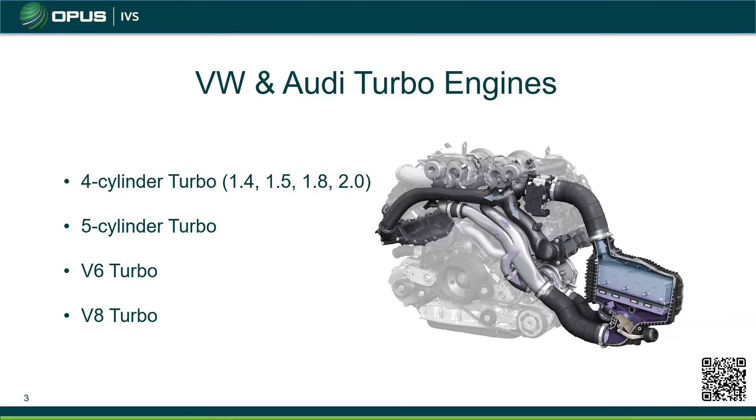The first engine we're going to talk about is the 1.4 and 1.5 liter. Other than previous generations, the 1.4 started using this turbo setup with essentially an air to water intercooler.

See Caesar raise his hand. Uh, okay, I don't think we have anything there.

So the next thing here is the 1.4 and 1.5. The 1.5 is the latest generation of the 4 cylinder turbos. Like I said, they're using these in the Taos and the newer Jettas. They are having some issues with head gaskets, but essentially the turbo issues you've seen in the 1.4 are also the same, so we'll talk about that as well.

Now, if you take a look at how this is set up on the 1.4, you have the turbo sitting in the back. Essentially there is no front mount intercooler like other vehicles. This charge air is going straight into the throttle, where the throttle is connected to the intercooler, which is also the intake. So essentially they're saving a lot of space, there's less turbo lag on here especially since this is a smaller engine, and you're cooling that air right as it's going into the engine. We're going to talk about why the turbos do that.

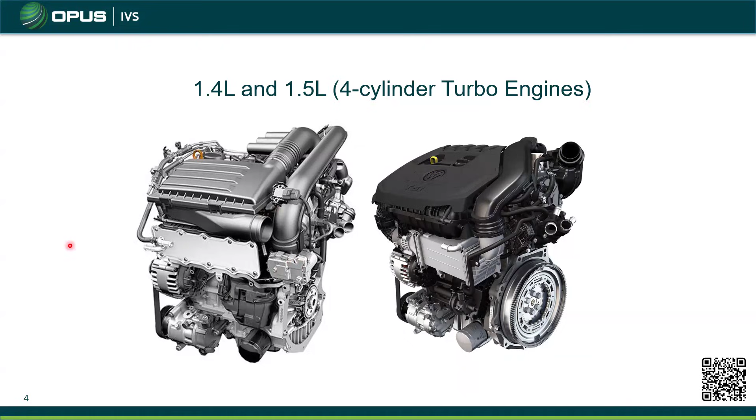The other 4 cylinder engine is the 1.8 and 2 liter. These are both 4 cylinder engines as well, and the 1.8 and the 2 liter are exactly the same. The only difference between the 1.8 and 2 liter was the stroke and bore of the actual engine. The design, the block, the cylinder head, almost everything else is exactly the same, coming down to the turbos. The turbos they used were slightly different, they have a slightly bigger turbo in the 2 liter, and power output is different. They use the 1.8 and 2 liter across both Volkswagen and Audi. The 2 liter itself has been used across Volkswagen, Audi, and Porsche.

We're going to talk more about the 2 liter because the 1.8 was essentially just 2 generations, or 1.5. The 2 liter is already 3.5 generations in. The first 2 liter turbo would be the BPY, belt driven, our true first generation. Then you had the first generation chain engine, CCTA, CBFA, all those, which is technically the second generation. Then we have the EA888 engines, which is the third generation, which is essentially what all the newer engines are derived from.

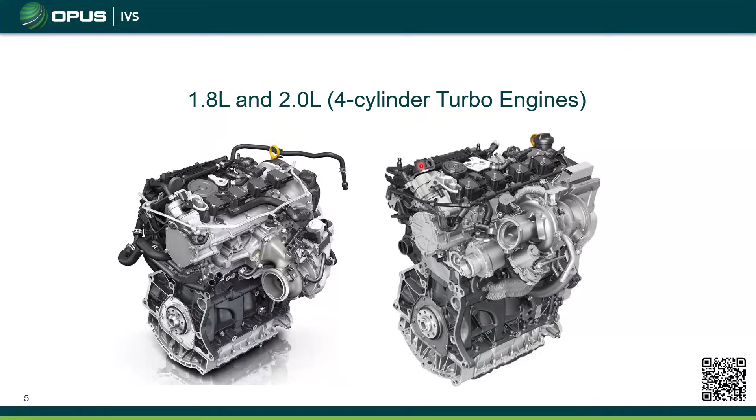2.5 5-cylinder turbo engines. These were essentially leftover 2.5 engines that Volkswagen had. They beefed it up, with different pistons and rods, but essentially the same cylinder heads. They slapped the turbo on it and threw this into the TTRS and the new generation RS3s. Those were the only ones that really ran this engine.

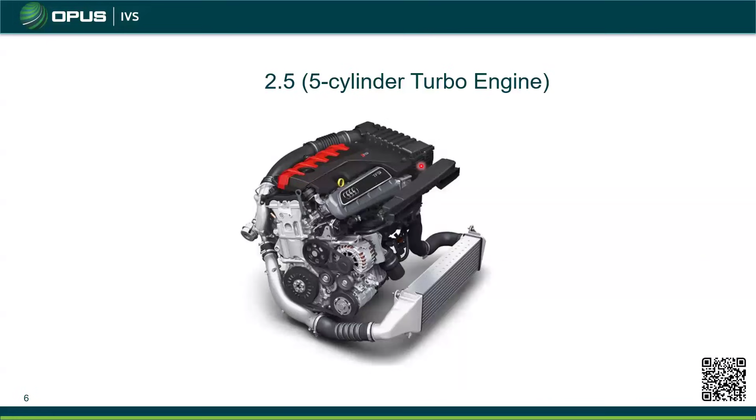Lots of tuners love it, and for the most part it's a bulletproof engine. Not too many issues with the turbos on these, but like I said, these were only in the RS versions of two particular cars. These are tuner friendly cars, making a lot of power, even more when tuned. But essentially this was the engine they put into those two RS cars.

Now we have two other V6 engines. Most of us are familiar with the V6 supercharged engine. The 3 liter single turbo engine is the exact same engine, except instead of a supercharger in the valley, now they run the turbo. Actually, it's not exactly the same - obviously the heads are reverse flow, but it's the same design. They reverse the heads and now have a turbo in the valley. The block and everything else is essentially the same.

The biggest difference is now you have the 2.9. Here's the crazy part: the 3 liter V6 turbo engines were in the S4s, the S5s, the A6, the A7, and I want to say the A8s as well, but then they switched to the 2.9.

The 2.9 is kind of similar to when Mercedes switched from the 5.5 liter down to the 4 liter. The only difference is this is a V6 twin turbo, now 2.9, about 100 horsepower and 100 foot-pounds of torque difference. They are using the 2.9 in the RS5, and also the S6, the S7s, and the RS4s. So some little key differences here.

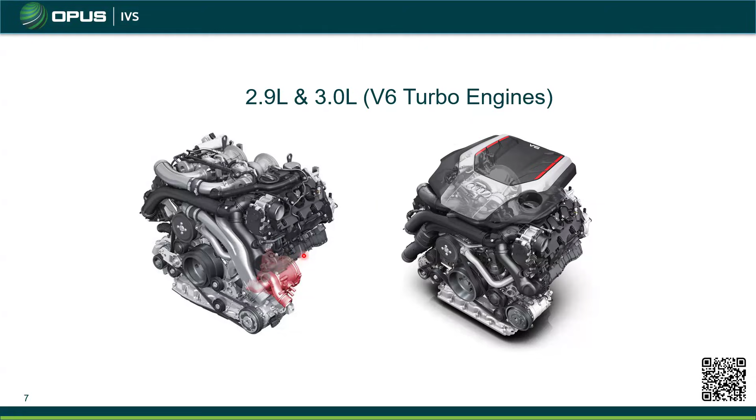We've seen low boost conditions with these engines. We've seen multiple things going on with it, and we're going to talk about that because it's actually something that's very common that we started seeing.

Now we have the 4 liter V8 turbo engine. This is in the big boy - the RS6, the previous version RS7s, and also the S8 and S6 previous versions, prior to 2020. Everything after 2020, S6 and S8 is going to be running the V6 twin turbo. So the 4 liter V8 twin turbo was used on the previous generation S6, S8 up to 2020. It's still the same current engine that's in the RS6 Avant and also in the RSQ8, which we all know is also the same as the Lamborghini Urus. So this is what they're running on there.

These things have seen multiple issues, obviously, as well. I'm sure some of you guys have seen the ones that have had issues - you'll see multiple things going on. Most of these are going to be oiling issues. There's going to be some things that Volkswagen has considered normal, but at the same time, once you see what happens because of the quote unquote normal condition, you'll see that we have seen multiple premature failures on the 4 liter V8 twin turbos.

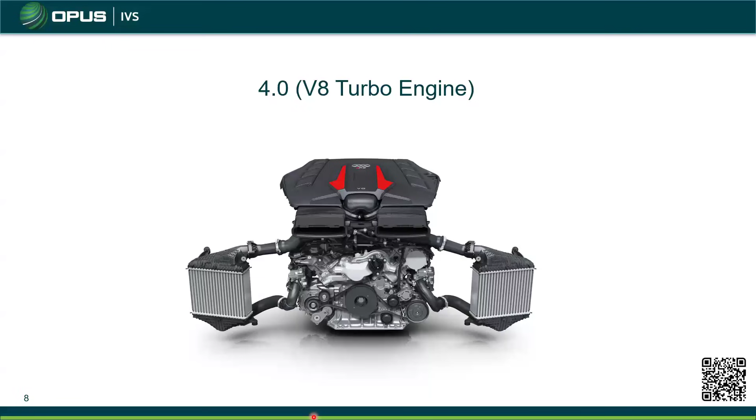So obviously we're going to talk about a little bit of design and operation of the turbo systems before we get into it, because obviously we need to know how the turbos work. Turbos are a way of essentially boosting the engine's output, right? Especially on an engine that would not be making that same type of power - hence the 1.4, 1.5, 1.8, 2 liter turbos. You've seen some of these pushing out 300, 400 horsepower once they're tuned, but even stock.

You see some of these, the third generation 2 liter turbos, they're making - I think Audi is making 261 is what they're rated at. Volkswagen is making about 250, somewhere around that. And this is from a little 4-cylinder 2 liter engine. Now obviously the V6 twin turbo, the V8 twin turbos are going to be making a lot more, and the turbos are smaller, obviously, to compensate for the torque. And essentially at the same time, what they're doing is helping with fuel economy, if you can say that.

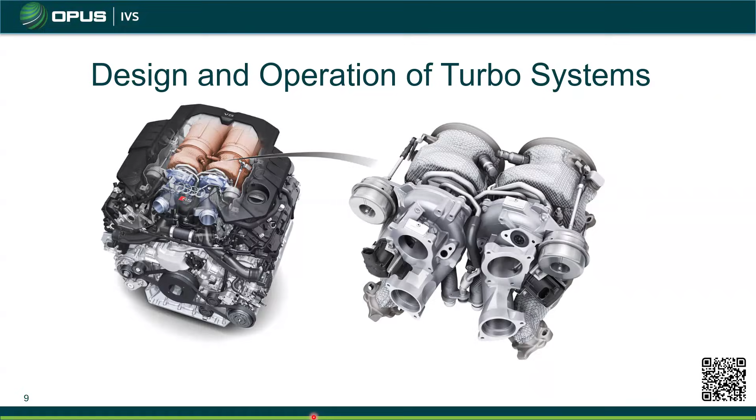Now, to understand the way the turbos are set up, we're gonna talk about this because we need to know exactly how the turbo works. So compared to the supercharger - the supercharger is belt driven. You have technically a turbine, or root style, and then you basically have a belt that drives that. Two different styles of superchargers - what we use is a Roots style supercharger, but essentially the way the system works is very similar.

Now with the turbo, we're going to use exhaust gas to spin the turbine, or the turbocharger side of the turbine, which is the hot side of the turbo. As the exhaust gas is coming out of the manifold or out of the cylinder head, it's going to spin the turbocharger turbine. Now that thing can spin as much as the exhaust gas that comes out - we need to regulate that, and how we're going to regulate that is going to be the wastegate actuator.

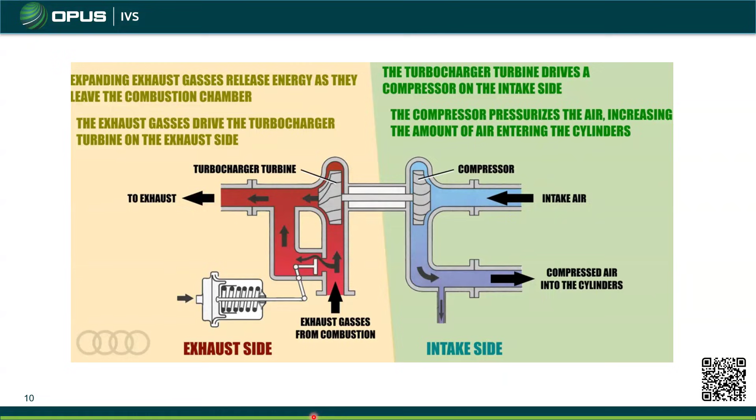We're going to get to that wastegate actuator part, but obviously talking about the turbo part - as the exhaust gas comes out, it spins that turbocharger turbine. As that turbocharger turbine spins, it's connected via a shaft to the compressor side, which is on the cold side of the turbo, or the intake side. So what that's going to do is pull in intake air, and the wheel on that - the reason they call it the compressor wheel is because it's going to compress the air. And as it compresses the air, it increases the amount of air entering the cylinder versus just having a throttle body suck in air. Now we're forcing air, hence forced induction, pushing that air into the cylinders.

That being said, as that compressor is spinning and compressing the air, when air is going through and being compressed, you're going to get a rise in temperature. Now, when you get a rise in temperature on the intake air, you're going to have a lot less power, right?

You guys ever notice if you're driving through the desert, your car feels sluggish on a non-turbo? But if you have cold air, driving on a nice brisk cold morning through the mountains, whatever the case, you're going to get more power because that cool air has a higher density, right? So that air to fuel mixture entering the engine is going to be greater, so you're going to have more power.

So that's the reason why we have these turbos in the car, is to increase the output of power, but for the same sized engine or smaller displacement engine. Now, what Volkswagen Audi use is going to be an intercooler, which a lot of manufacturers use to cool that air down.

Now, a lot of the V6s, V8s, and the 5-cylinder turbos are going to use an air-to-air intercooler. Even the 2 liters. Only the 1.5 and the 1.4s use an air to water intercooler, which uses coolant to cool down the air that's going through. And that way you have that cooler air going into the intake.

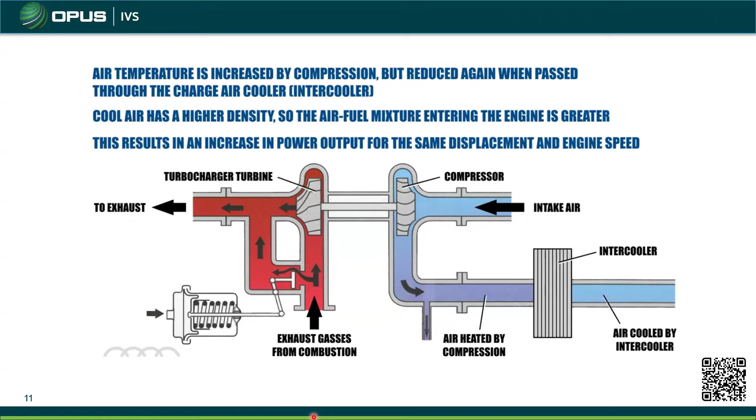That being said, there needs to be a way to control the hot side of the turbo, which is where the wastegate regulator comes in. Now, Volkswagen and Audi have used three different types of wastegate. And this is very important because you need to understand, if you look at the operation of the wastegate, one is actually backwards of what you would normally think, right?

So we have three different types. You have a pressure operated actuator, which is usually via a spring. You have a vacuum operated actuator, which is going to be using engine vacuum to operate that wastegate. And then electrically operated, where there is absolutely no vacuum being controlled, and it's going to be strictly the electric motor that controls it, which obviously, as electrical concerns go, we do see issues with that, which we'll talk about.

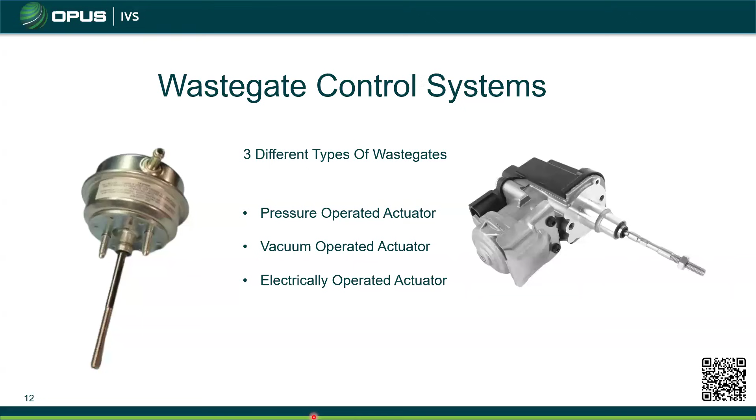But continue on here. Older systems use a pressure operated wastegate servo unit to open and close the wastegate valve, right? So the wastegate servo unit is actually the wastegate itself. There's a return spring that keeps the wastegate closed, right?

Charge air pressure regulated by the ECM. So the charge air pressure, you're going to have a MAP sensor or a charge air pressure sensor that reads how much is going through.

It's going to pulse width modulate the N75 valve. So the N75 valve has a vacuum line that goes from the intake side, and it's going to also just be a shutoff valve, controlling that to the wastegate itself. The ECM has a preset there that will essentially control how much that engine is boosting - that's where we have engine tunes and whatnot.

ECM determines how much charge pressure passes through the valve by increasing or decreasing the duty cycle on the ground signal. So if you had a P0299 low boost fault, you can actually scope that N75 and see where our duty cycle is going. We do have issues with N75s since it's electrically controlled, and we want to make sure it's not the ECM doing something weird. It's a return spring that keeps it shut, and those return springs can be an issue as well - we've seen them fail and stick open.

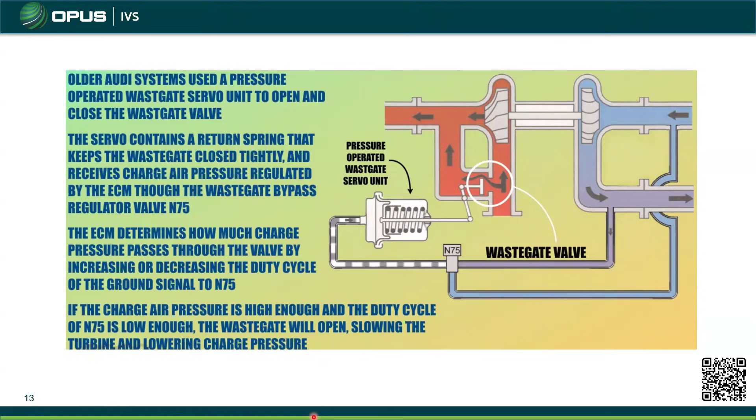Like I said, these are older style engines like the BPYs, but this is something we need to know. So charge pressure is high enough, the duty cycle of the N75 is low enough, the wastegate opens and slows down the turbine, basically slowing down the charge pressure because we've seen the max of what we want to see. The car is happy - that's as much power as you're getting, obviously that's where tunes come in to get more power, et cetera.

Now some of the newer systems have a vacuum operated actuator used to open and close the wastegate valve - not just one way or the other, this is used to open and close, vacuum operated to regulate the charge pressure. On these systems, the wastegate valve is opened using mechanical spring force. If charge pressure is required, the flaps are closed using the vacuum actuator. The wastegate bypass regulator valve N75 is going to be pulse width controlled, and it constantly uses signals from the charge air pressure sensor G31, and on some, charge air pressure sensor 2, G447.

Because some of these cars are running two intercoolers, usually charge pressure sensors are either on the charge pipe going up to the throttle body, or like a twin turbo engine, they're on the intercooler as well. So that's something that we take a look at.

Wastegates on the newer engines - and not every new engine uses this, because a lot of the V8s are still using this style vacuum operated actuator with the N75. So you're going to see this style on some of the cars, and you're going to see a lot of these other styles on some of the cars as well. Now this is the newer ones that we see a lot of.

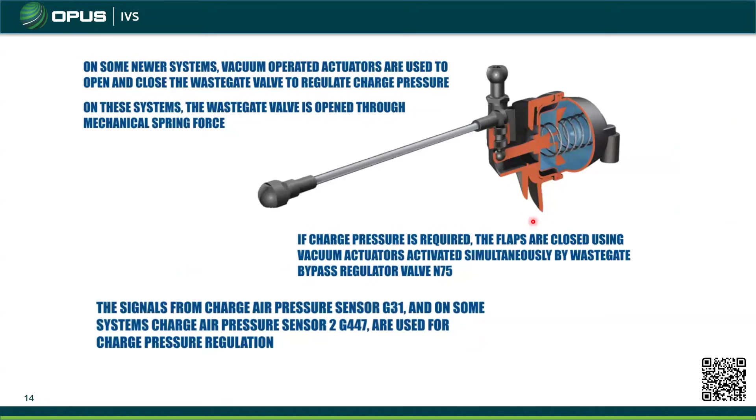Because this little bad boy right here, when this rod moves back and forth, over time this manifold, this part of the turbo, is going to heat up. There's a bushing in there that this rides in. That bushing wears out, and then this flap starts moving, just like the previous generation where we're using a vacuum actuator on here, same thing.

This will wear out, and when that wears out, they do sell repair kits. There are people that sell repair kits. There is a pin that you would have to push out or drill out, and then this will allow this rod to come out of the turbo, and you can replace the sleeve and then put a new flap in and reinstall it.

But why? At that point in time, with the amount of work you're doing into it, the amount of modification you have to do to that turbo, you're essentially putting a bigger band-aid on that turbo.

Now, the other thing I'm going to talk about here is this. This is your N249, the bypass valve. This bypass valve was ran on the electric wastegate actuators and also the vacuum operated ones, but this is an electric bypass valve. Now, the issue with the electric bypass valve, what we've always seen, is going to be a torn diaphragm.

And now you get a boost leak from the diaphragm. It's going to bleed off. Now, that may not be a big deal and people just replace it, but you have to remember, they came up with an updated part. We don't see too many issues with this, and if we do, it's at a higher mileage.

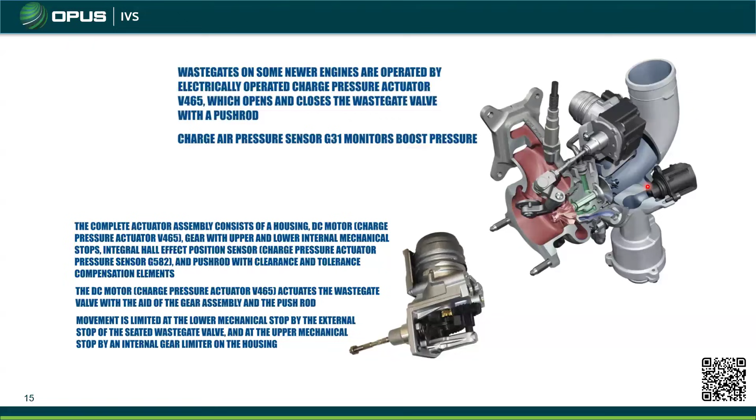So the biggest advantage over the old school pressure actuated with the spring is going to be multiple things. Heat loss is reduced during the warm up phase of the cat converter, because the heat flows through and bypasses the turbo turbines when you're first starting it up. So the heat's going directly into the cat converter after the engine starts.

Exhaust pressure can be reduced at part throttle by opening the wastegate valve. So the wastegate valve is obviously not just used to control the amount of boost pressure you are building, but it is also used as far as emissions. Wastegate valve opens briefly during transition to the overrun phase. This keeps the turbine at high speed and helps reduce lag. At the same time, back pressure at part throttle by opening the wastegate valve also controls the emissions on the car. So that's part of the reason why they went to an electric wastegate, because it can be controlled a lot faster versus the amount of vacuum going to the actuator itself.

All right, so we've seen these things happen. Bear in mind, this is a better image of the wastegate opened up. And if you take a look, this rod just goes back and forth based on the position of this motor. If you look, this is the actual DC motor, and it's got a brass gear.

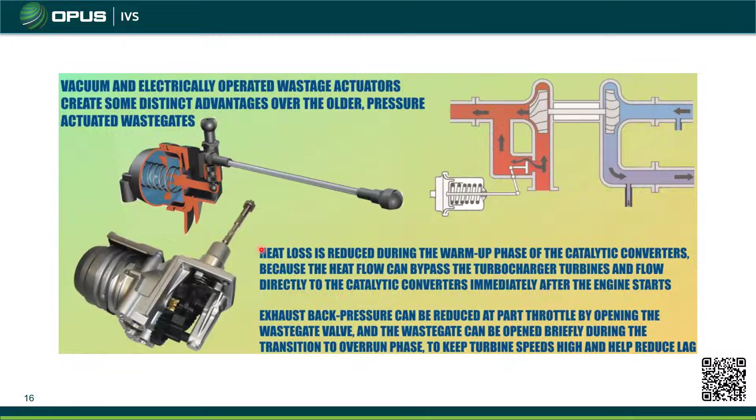Realistically, this is one thing to pay attention to when you're getting these P0299 faults or P334A charge pressure actuator faults. The P0299 fault is boost pressure regulation, control pressure not reached. P334A is charge pressure actuator electrical error. So remember, we do have electrical errors because it is an electrical wastegate actuator.

So you can definitely see some concerns with that because of pin fitment, wiring, right? We get rodent damage, whatever the case. What do rats like to do? For all the people who live in the cold states, even where I am at in California, they find somewhere nice and warm. Turbo is always warm, right? Then you got the charge pressure actuator here, which is electrically controlled. You got a harness going to it. What do they love doing? Chewing on wires, right? So this is something we want to take a look at.

So we'll get these two faults. Now these are the most common faults that we see: low boost faults, and like I said, a lot of charge actuators are electrically controlled, so we're going to see a lot of those as well.

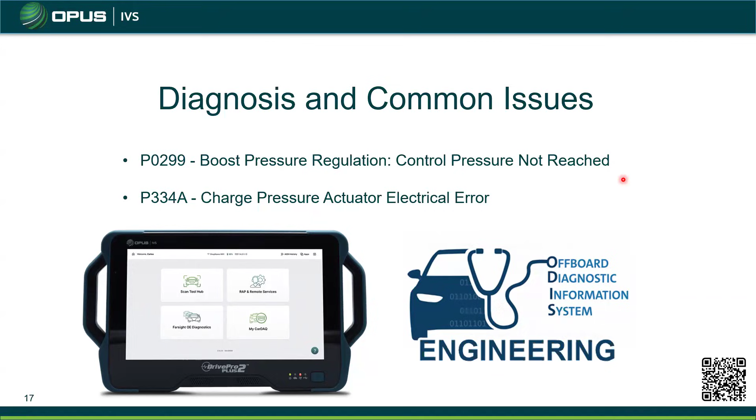First step in any of these, when you get a car, customers complain of a low boost concern, or 'hey, I don't have any power, my car doesn't feel like it's doing anything' - we have some issues, obviously we're going to scan for faults. We want to see what faults are actually in the system.

9 out of 10 times, you could probably get a little boost fault, P0299. Step two, you already got the scan tool hooked up to it, we got to go drive and verify the customer's complaint anyways. Let's monitor boost pressure, specified and actual. You're going to go into the engine control module, peruse through the measured value blocks, and look up boost pressure. On Volkswagen Audi, I think it's measured value block 90, 10, or 103 or something like that, depending on the car. Some of the UDS is a little bit different, but you go and look at the boost pressure and go drive the car.

Let's go see, customer's complaint is lack of power. Maybe it has no faults, because here's the thing - the P0299 fault won't set right away. It's going to monitor over a course of multiple drive cycles and see what it does, unless you have like a wastegate stuck or something, then you're leaking boost. But you would see that in your charge pressure readings. So go drive the car, monitor boost pressure.

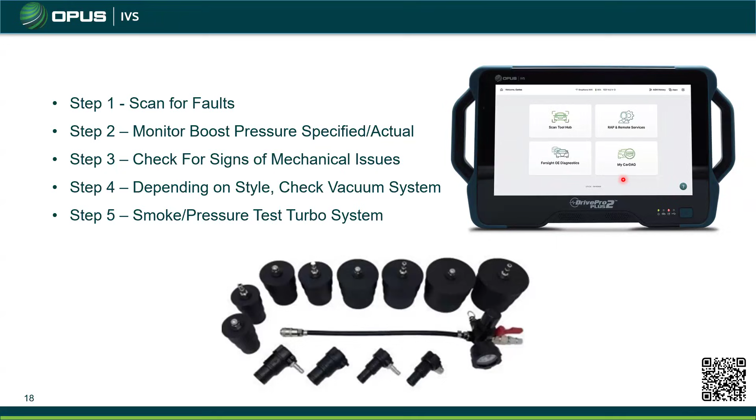So, like that. A lot of things - just like Chris Martinez here, rev it up, shut it off - you can hear that too, you can hear the turbo. Depending on how bad it is, you can actually monitor the boost pressure and do it. A couple other ways to check that as well.

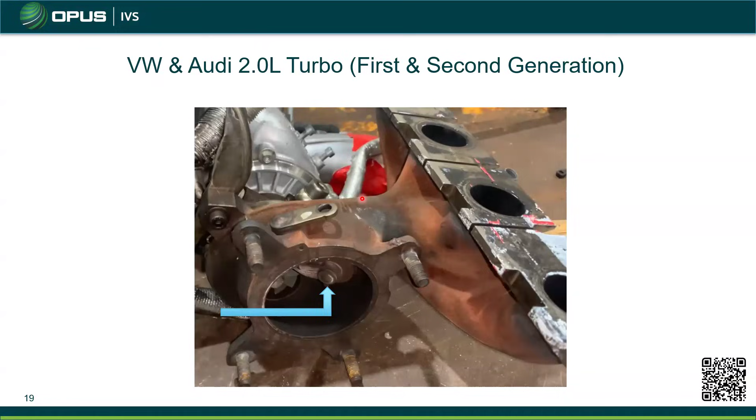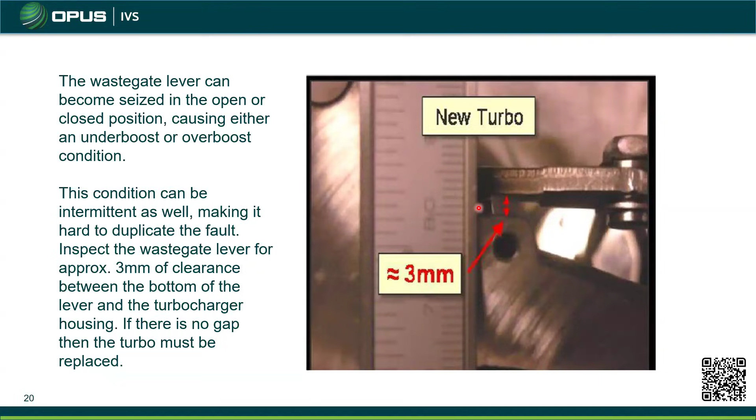So when you look at it, it needs to have at least 3 millimeters of clearance between the bottom of the lever and the turbo housing. If there's no gap, you've got to replace the turbo - this is not something you can fix. And this is that bushing that everyone keeps talking about, but realistically, like I said, replace the turbo. Most of the time when we see this, you're going to want to replace the turbo.

Electric wastegates - how many of you guys have seen this?

Now, if you replace just the actuator, on these ones, it's not adjustable. So all you have to do is tell the car, hey, the turbo's been replaced or the actuator's been replaced. Good to know. When you replace the new turbos with the wastegate actuators, same exact thing, make sure the car is adapted. Now, for the guys that want to do the special ones with the adjustment and replacing just the actuator, you do need a special tool on the actuator to hold it when you're adjusting the rod, or else it will move and it will never go in range. Other than that, like I said, if you're replacing the turbo, adapt the actuator.

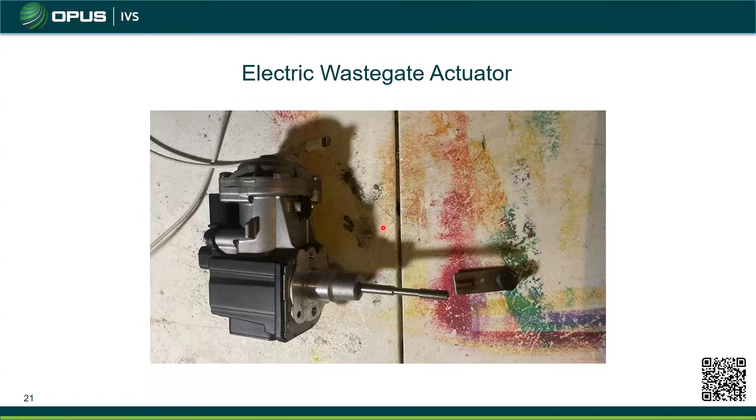Another note on these as well, on the 1.8s and 2 liters, you got to check for the adjustment on the turbo ease of movement. If it doesn't move, it's going to have an issue with the turbo itself, right? We've seen this thing stuck. Same thing here, electric wastegate. These are the adjustable ones.

Now, the other thing you want to take a look at on here is you can actually operate this by going into the scan tool. And then when you go into the scan tool and you actuate the wastegate, what you're going to see is this should move freely, right? Same thing when you start the car up, you'll hear the turbo adjust. If you don't see it moving, this thing's stuck. It needs a turbo.

Key note when you're replacing the turbo - I don't know if any other scan tools have it, but on ODIS, they do want you to turn off the oil regulation valve because they want higher pressure for at least the first 1,000 kilometers. Because what it needs to do is make sure that the oil is pressurized quickly at full charge. And two, what it's supposed to do is take out the contaminants in the turbo, and then you're supposed to do an oil change after that. There is a test on ODIS that turns off the oil regulation valve so you have higher oil pressure for, one, first lubrication of the turbo, and two, it takes out all the additional material contaminants that in theory we shouldn't have in a turbo, but it's there.

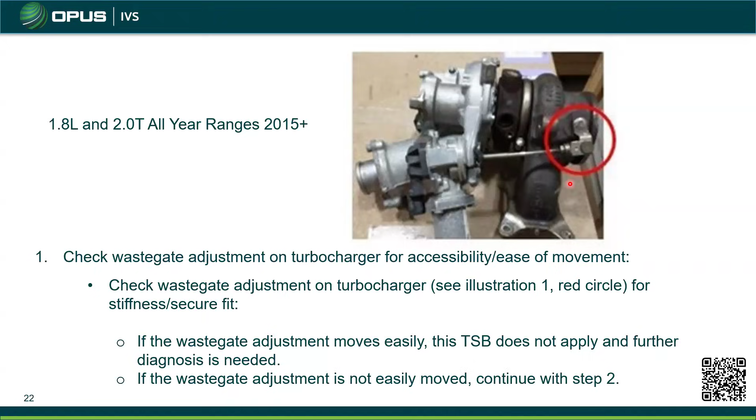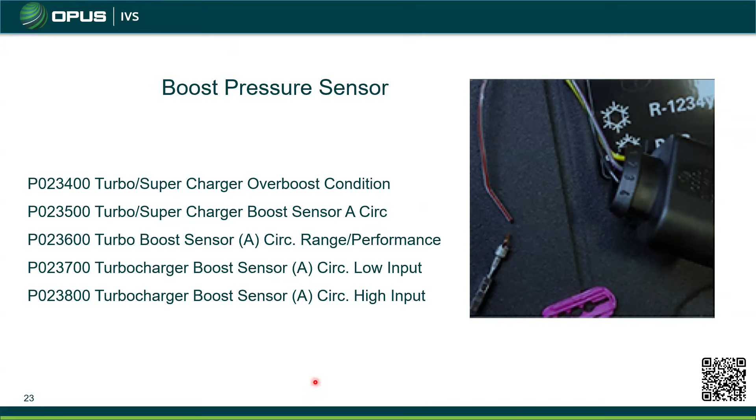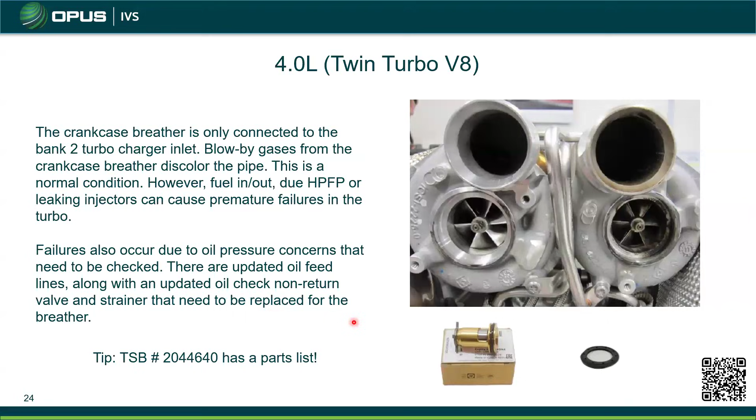Secondly, per the technical bulletin, this strainer needs to be updated in the crankcase breather, and there's an oil check valve that needs to be replaced in the cylinder head. What that does is the oil isn't getting fed correctly to the turbos, causing premature turbo failures. They had a technical bulletin on this - you have to update all the components, including new oil feed and drain lines. You'll normally see scrapage along the compressor housing when you look at it, but you've got to verify that, and also verify oil pressure. We've seen oil pressure concerns cause the exact same thing with the turbos.

2.9s or 3.0s with their single turbos - have any of you seen this one? P0299 faults, low boost faults. You pressurize the system, no leaks. You go and drive it, and sometimes your boost will fluctuate. Here's the issue.

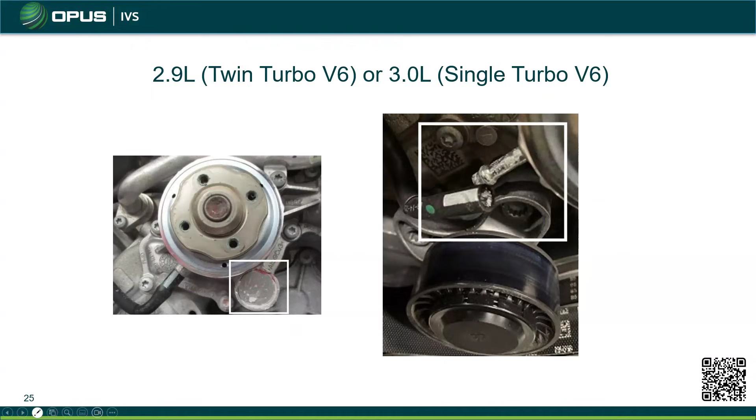This right here is the bottom of the water pump. As we know, the water pumps on these, and some of the 4 cylinders and the 4 liters as well, have a vacuum controlled diaphragm for the water pump. What happens is we're actually getting leakage, and this is usually a sign - if you see leakage at that port on the water pump, pull the hose out and you'll see coolant residue. What happens is you get coolant from the pump going into what they call checkpoints or check valves, which are the controls. They go to the wastegate. What happens when they go to the wastegate? You're not going to get any boost because it's not operating the wastegates correctly. So a lot of these, in order to replace these valves, it comes with the lines, so you're pretty much replacing everything, including the pump, since that's the main culprit.

Now that doesn't fix everything because there's one more place you need to check - this vacuum reservoir. A lot of people miss that because they replace what they see and where the coolant is. But what happens is coolant gets into the reservoir and just sits in there. So you drive the car again, and now you're getting coolant back into the system because there's coolant in the reservoir. It does the exact same thing again and you still keep getting low boost. That's what you'll want to take a look at. This is a common issue on the 2.9s and 3 liters - coolant migration. We've seen a couple of these on the 4 liters as well.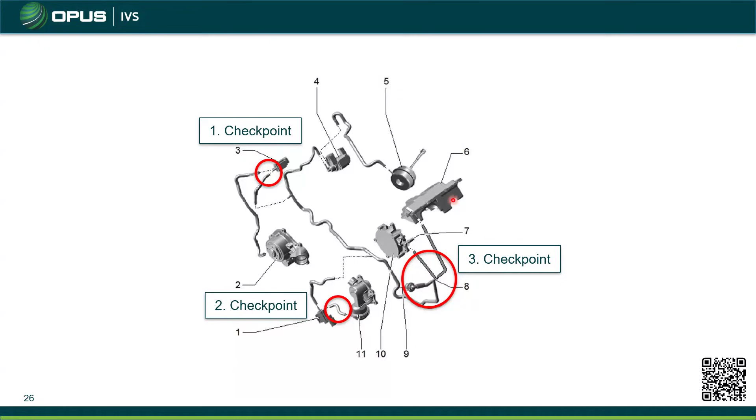Another thing for the 4 liters and the 2.9/3.0s, but more common on the 4 liters, is the vacuum supply. We've seen issues with collapsed hoses, and that causes irregular readings to the ECM. The ECM then calculates it incorrectly, and your wastegate gets controlled incorrectly because of the bad vacuum reading. The reason I have this one highlighted is it's the most common issue on the 4 liters, where the line that goes to the coolant pump is actually collapsed, and sometimes it's hard to see. There's an updated vacuum line for that. It was poor manufacturing basically, but think about it - it's a rubber vacuum line off an engine, right in the middle of the engine, it's going to wear down.

So this is something to always check. And like I said, you want to check vacuum at multiple places. Where your vacuum differentiates, that's where we're going to see the concerns and the issues here. So that is something we definitely want to take a look at when diagnosing these things.

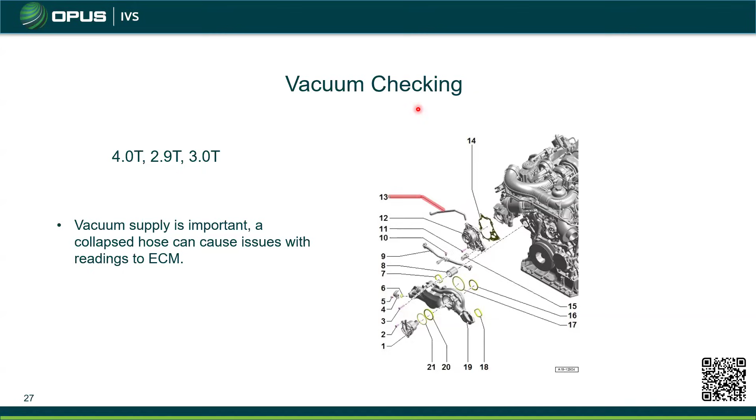Other than that, that's the end of our webinar.